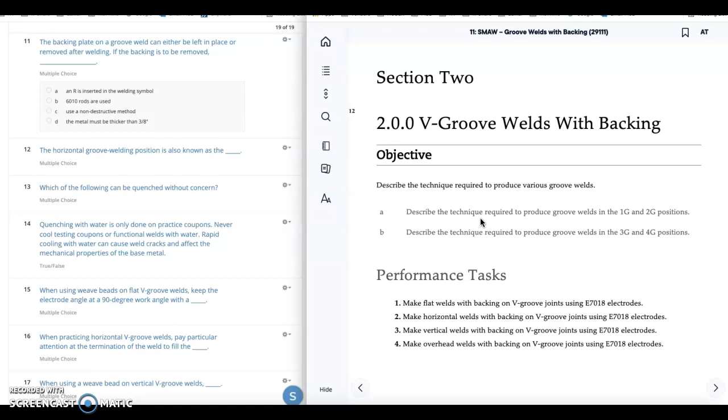Our objectives are to describe the technique required to produce groove welds in 1 and 2G, and describe techniques required to produce groove welds in 3 and 4G.

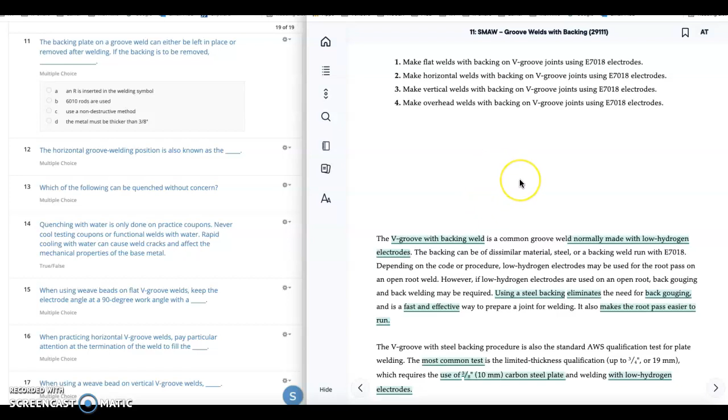Performance task is going to be a 1, 2, 3, 4G weld using 7018s. We're going to be doing that in the lab. You guys have been working with padded beads, which is really not a lot different, but there are some differences, and we're going to have to start using those coupons. You're going to have to start assembling, cutting metal, beveling, and assembling.

V groove with backing is normally made with low hydrogen 7018 electrodes. Using steel backing plates eliminates the need for back gouging and is a fast, effective way to prepare the joint for welding. It also makes welding the root pass easier because you don't have to worry about blowing through like an open root. The V-groove with steel backing procedure is also used as the standard AWS qualification test for plate welding.

The most common test is the limited thickness qualification up to 3/4 inch, which requires use of a 3/8 inch steel plate and welding with a low-hydrogen electrode.

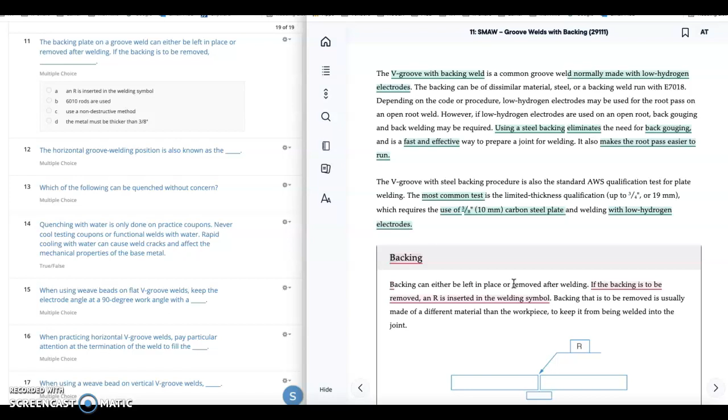Interesting little footnote here. The backing can either be left in place or removed after the welding is done. If the backing is to be removed, an R is inserted in the welding symbol. See right here, the little welding symbol with this weld together. The R stands for remove.

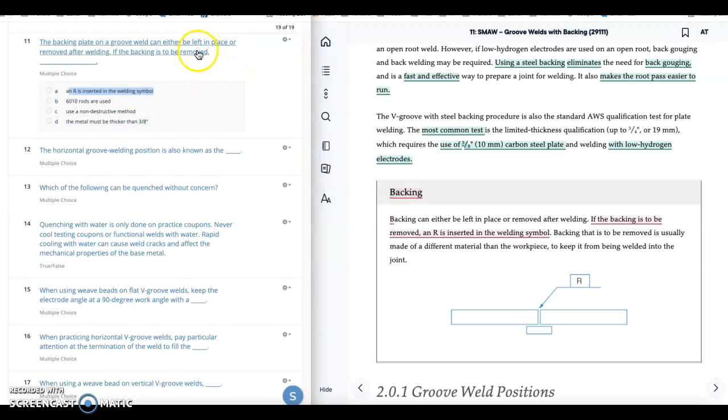Test question over here. The backing plate on a groove weld can either be left in place or removed. If it is to be removed, highlight: an R is inserted in the welding symbol.

All right, let's talk about groove weld positions. Groove welds can be made in all positions. The weld position for plate is determined by the weld and the orientation of the workpiece. For a groove weld in a flat position, that's 1G; horizontal is 2G.

Test question, study guide question. Horizontal groove weld position is known as 2G. Groove weld positions for plate are flat, which is 1G, horizontal is 2G, vertical is 3G, overhead is 4G. You guys should know all 4 of these by now, you've been welding them. There should be no confusion, it's 2G for groove, 2F for fillet.

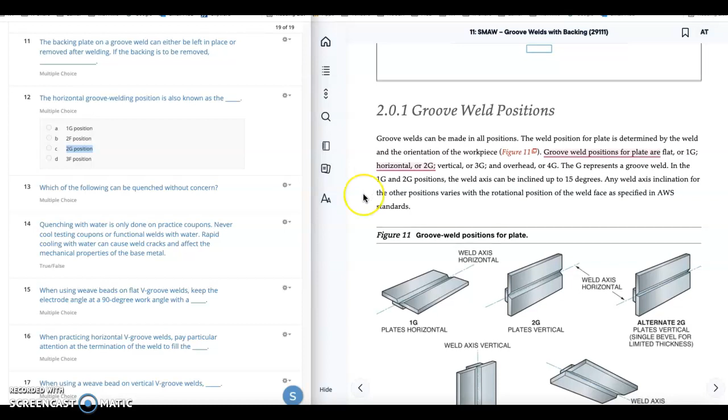F and G and 1 through 4, that mystery is solved. Which of the following can be quenched without concern? Okay, let's talk about quenching.

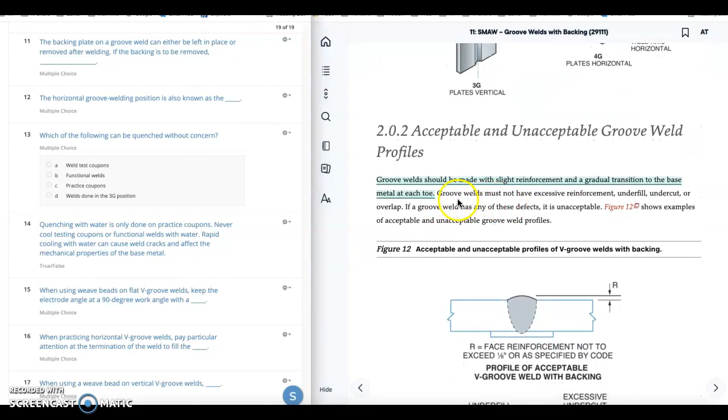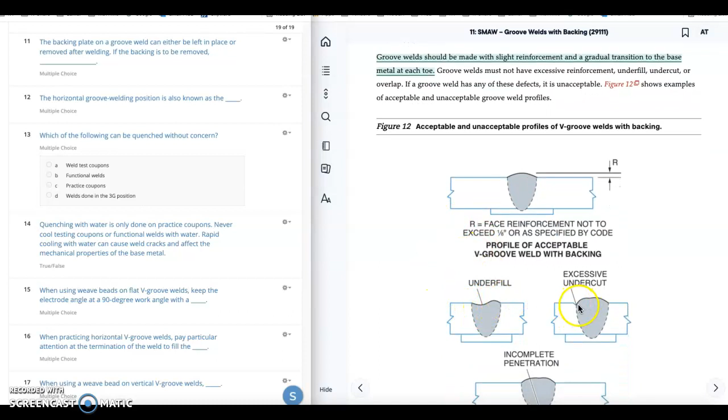Groove welds should be made with slight reinforcement, gradual transition to the base metal at each toe. Here's some examples of underfill, excessive undercut. This is a proper, acceptable weld. Incomplete penetration would show up on the X-ray as incomplete penetration. The root weld did not have 100% penetration down to the backing strip.

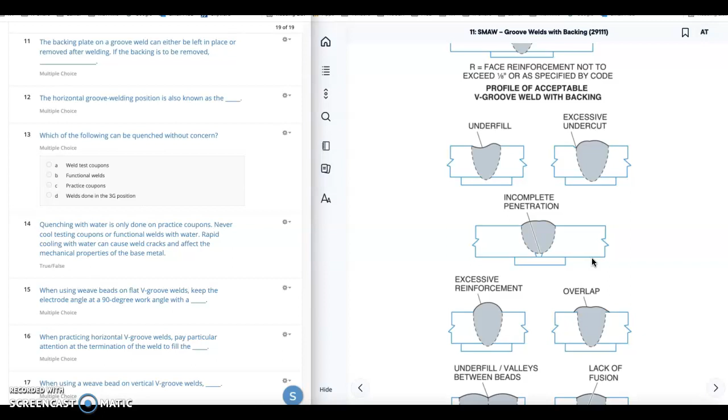Excessive reinforcement, this big hump right here on top. Overlap is too much on either side, with a little concavity in the middle, or convexity in the middle of the concave. Underfill is valleys between the beads, that's another form of lack of fusion. Here's some lack of fusion down here that would show up in the X-ray.

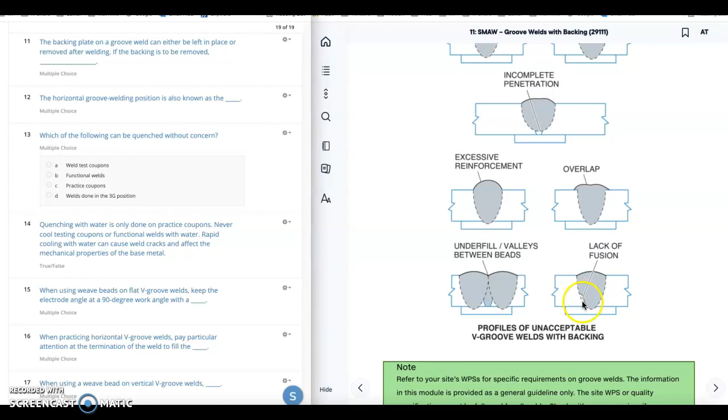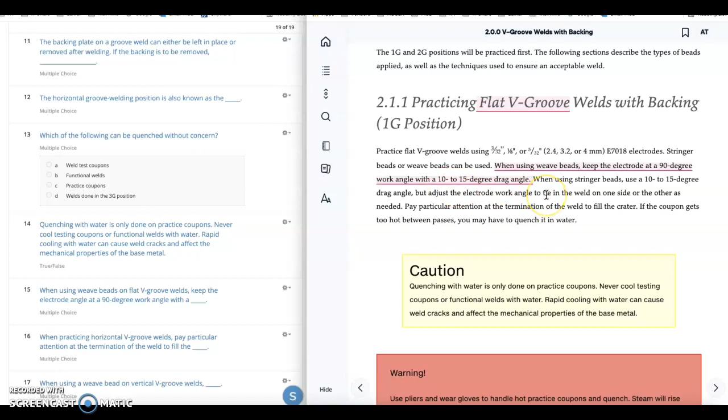Turn the page. Flat groove weld: when using weave beads, keep the electrode at a 90-degree work angle with a 10 to 15 degree drag. Practicing flat V groove welds with backing, 1G position. There's your rod angle when you're in the 1G.

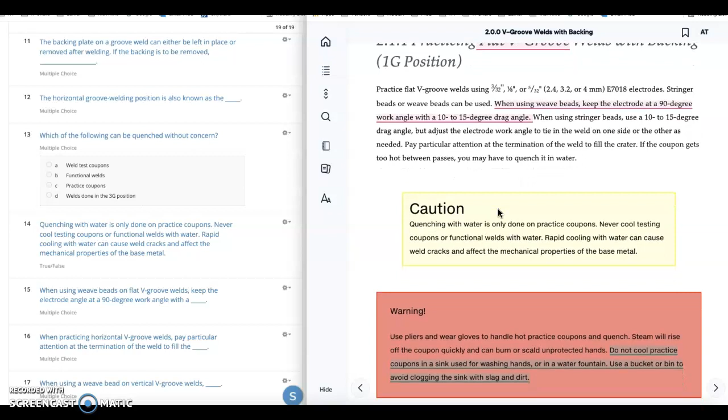Do not cool practice coupons in a sink used for washing hands or in a water fountain. Use a bucket or a bin to avoid clogging the sink with dirt.

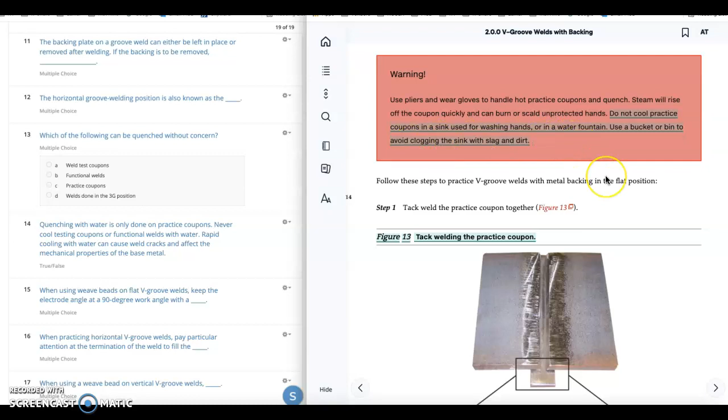Quenching with water is only done on practice coupons. That's actually a test question. Never cool testing coupons or functional welds with water. Rapid cooling with water can cause welds to crack.

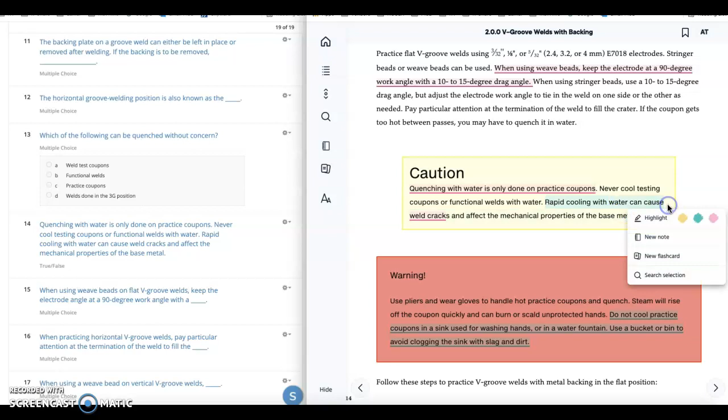Which of the following can be quenched without concern? The answer is practice coupons.

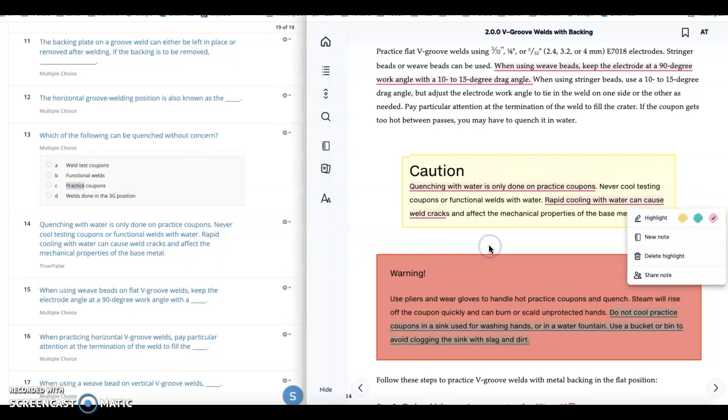Quenching with water is only done on practice coupons. Never cool testing coupons or functional welds with water. Rapid cooling with water can cause weld cracks and affect the mechanical properties of the base metal. True or false? That's true.

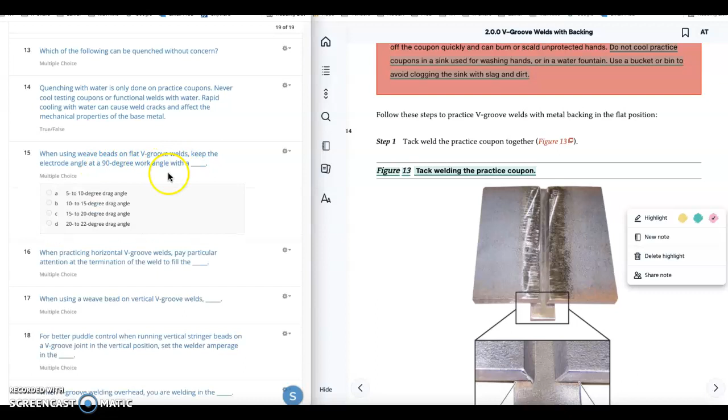When using weave beads on flat V grooves, keep the electrode angle at a 90-degree work angle with a 10 to 15 degree drag angle. So on flat, 10 to 15 drag angle. 90-degree work, 10 to 15 drag. These are flat or 1G groove welds.

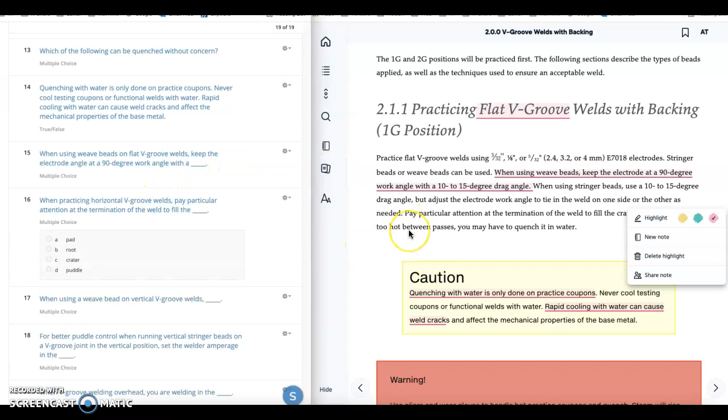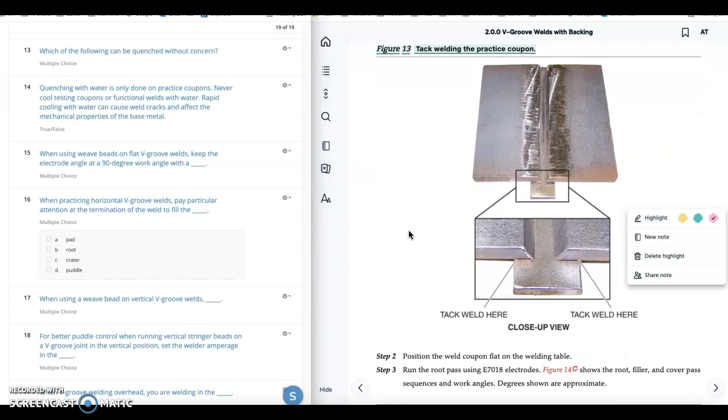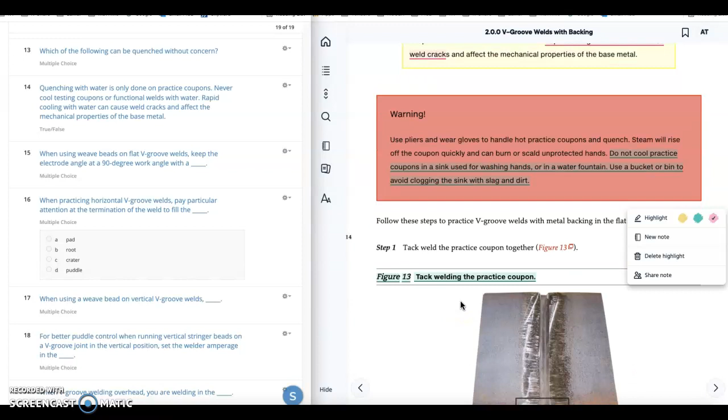When practicing a horizontal, tack weld the practice coupon. Tack weld here, tack weld here, tack it together. Position the weld coupon flat on the table. Run the root pass using 7018.

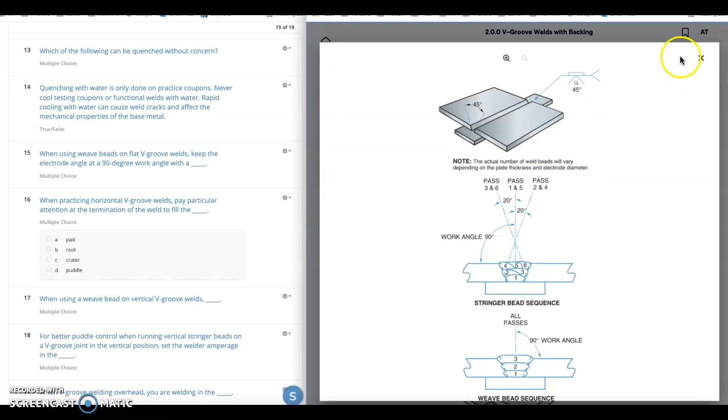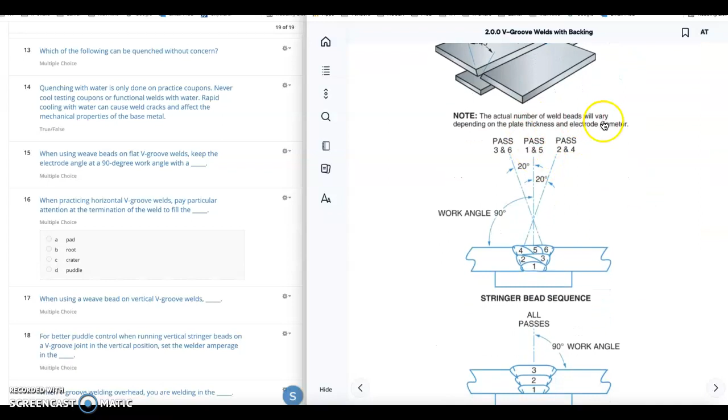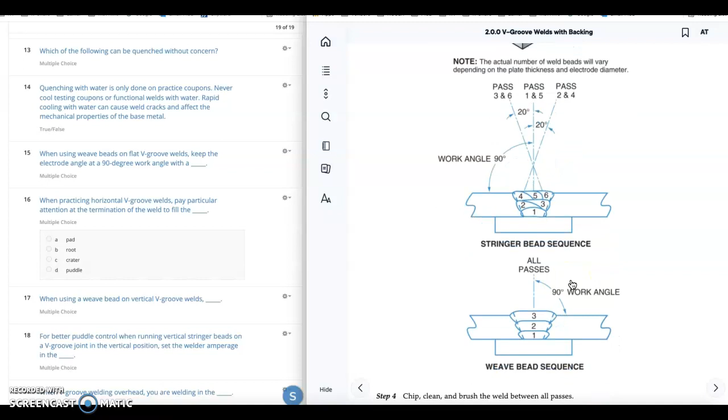The actual number of weld beads varies depending on plate thickness and electrode diameter. We use a 3/32 welding rod, so you're going to look at 6 passes: root, fill, cap. That's what you should expect. These weave passes are not acceptable for the welding competitions. If there's a new WPS, if it's not out yet, it's coming. We're not going to practice this because that's going to handicap us if they force us to do a multi-bead cap.

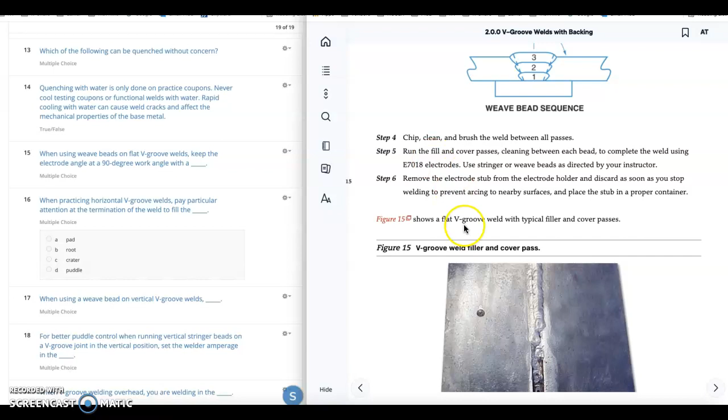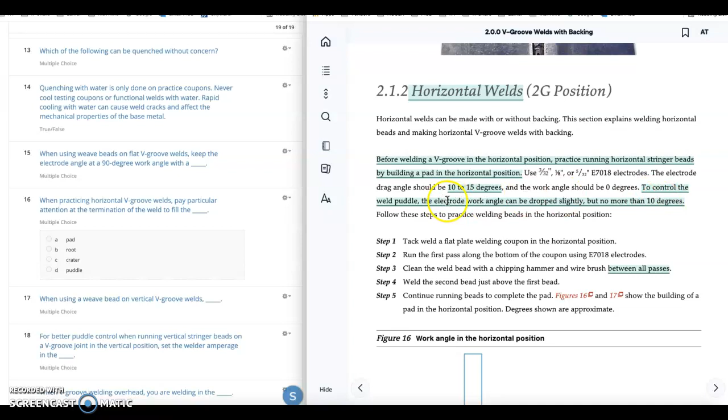All right, moving right along. V groove, 2G. Before welding in the V groove, the horizontal stringer beads are basically the same. Drag angle 10 to 15 degrees, work angle should be 0. To control the weld puddle, the electrode can be dropped slightly, but no more than 10 degrees.

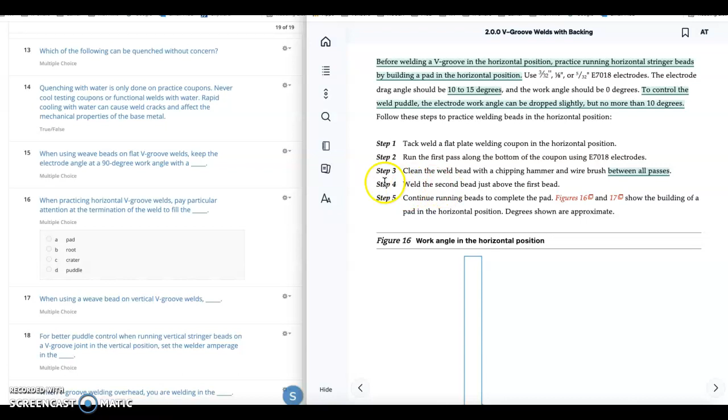Clean it between passes, and just practice. You want to start at the bottom and then stack them up. Don't start at the top. When you're going left to right in a 2G, you want to start down here and fill it going up. If you start up here and try to fill it going down, that's going to be a disaster.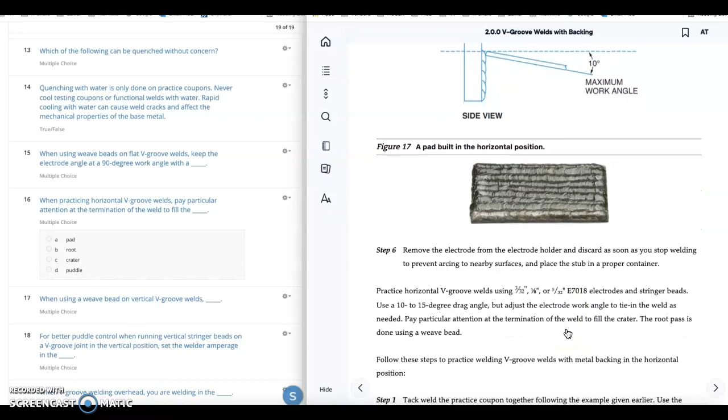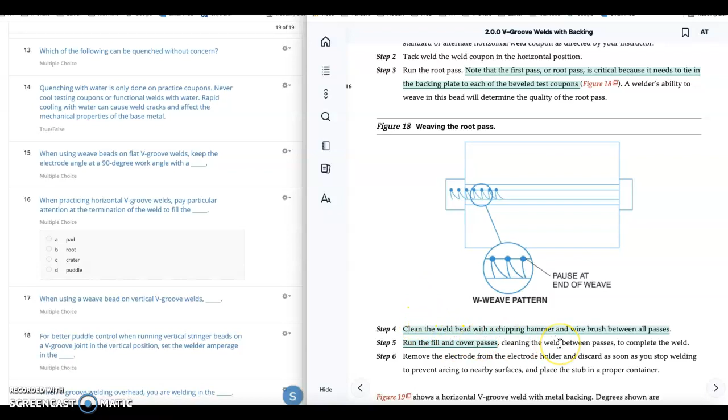Note that the first pass, the root pass, is critical because it needs to tie into the backing plate of each bevel test coupon. Weave a root with a W weave - you can see how they do little W's. You want to pause at the end of each weave. Clean the weld bead with a chipping hammer and wire brush between all passes. Run the fill and cover passes.

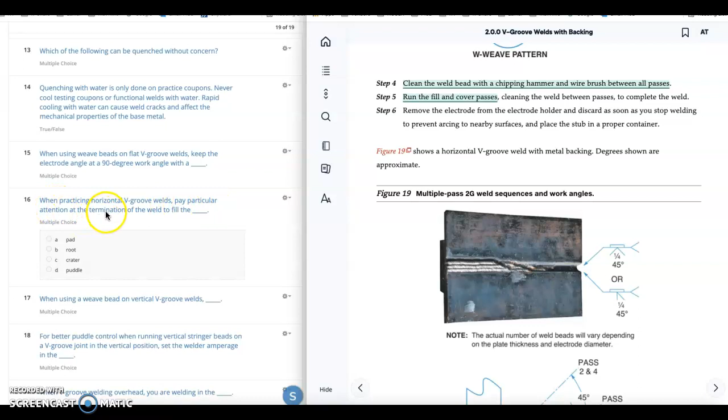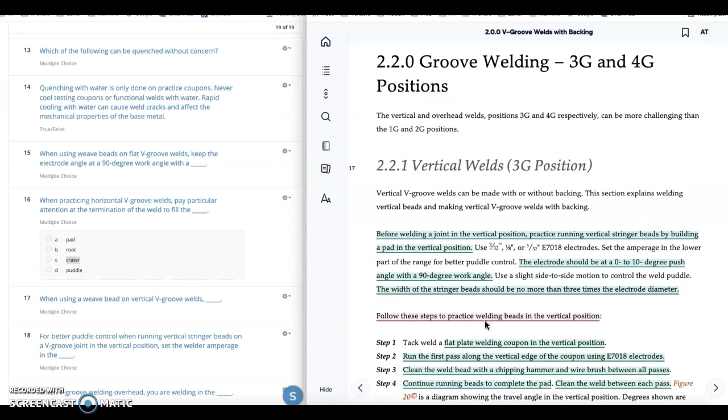This question says, when practicing horizontal V grooves, pay particular attention at the termination or end of the weld to fill the what? Fill the crater. I'm not sure where that is, but that's the answer. Follow these steps.

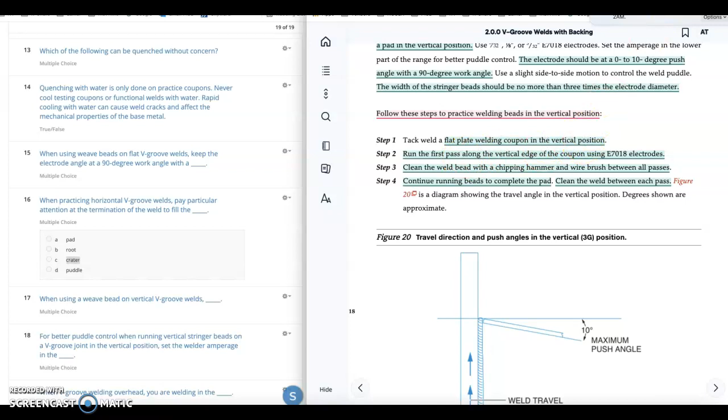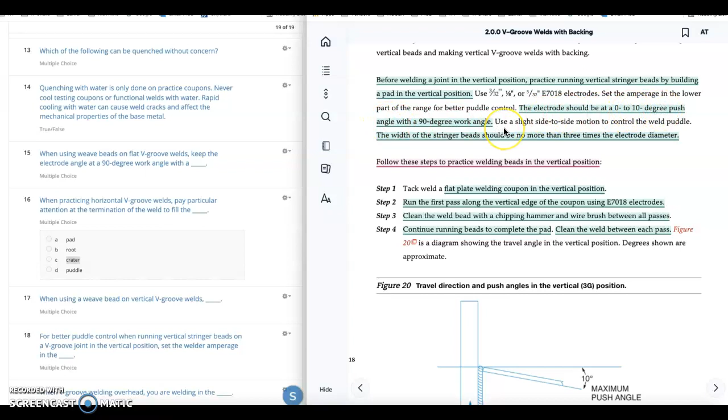Here we go with 3G position. Basically, you assemble your coupon and set it up. Clean between passes. Here's your rod angle - should be 0 to 10 degrees push with a 90-degree work angle. So you're just, you guys know this, you start down here and you're running it up. Just a little bit of a push, 10-degree rod angle.

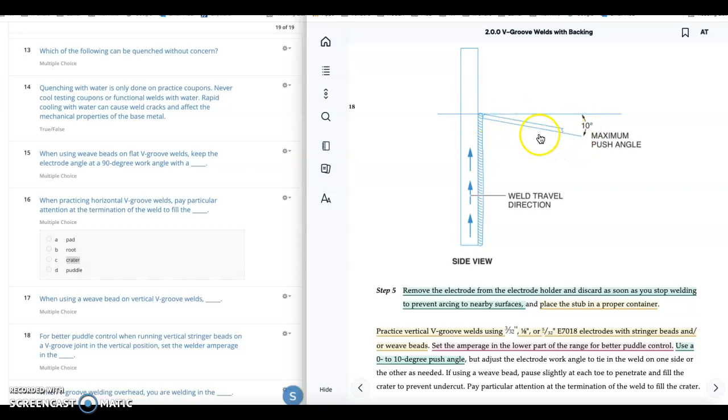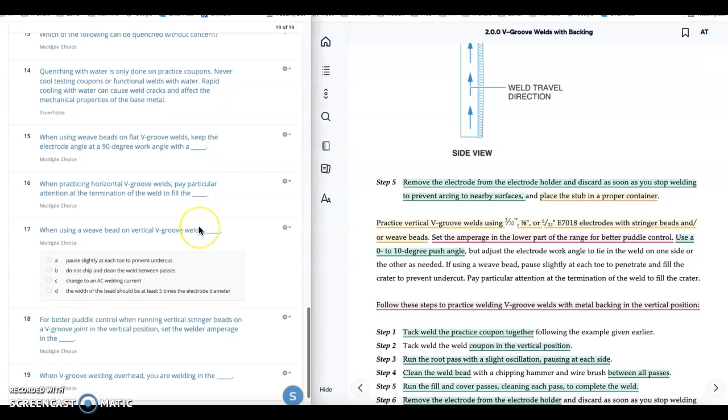Set the amp on the lower part of the range for better puddle control. When using a weave, make sure that you pause slightly at each toe to prevent undercut. For better puddle control, stay in the lower part of your amperage range.

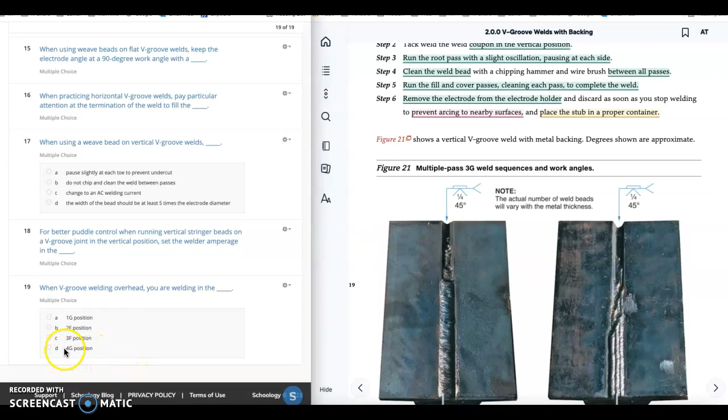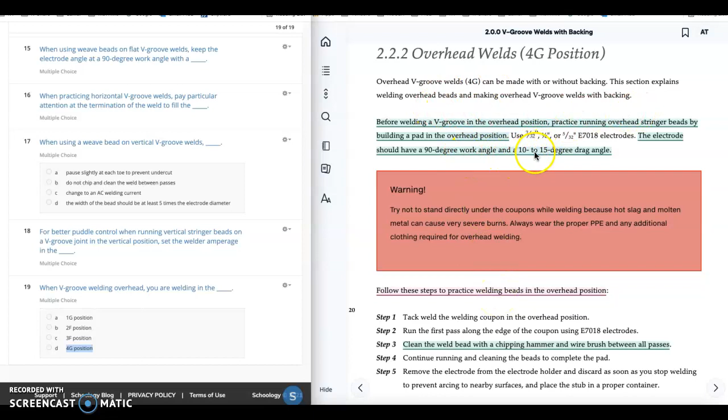When V-groove welding overhead, you are welding in the what position? What position is overhead - 1G, 2F, 3F, or 4G? I hope you guys said 4G, because it's 4G. Welding overhead in a 4G, you're going to keep a 90-degree work angle, 10 to 15-degree drag.

Follow these steps. Here's a good drawing. Weld direction is this way, 10 to 15-degree drag, moving in this direction.

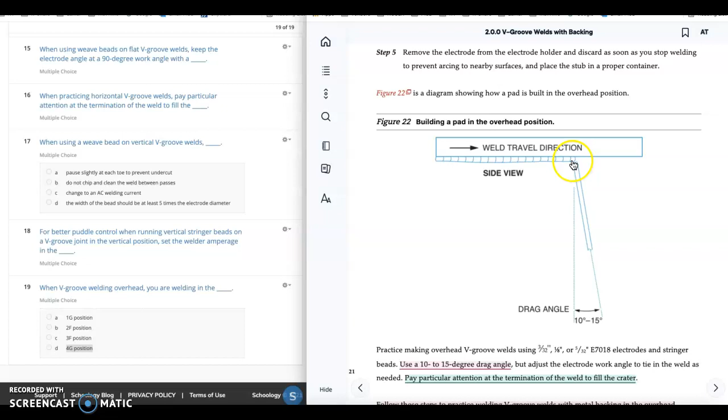And finally, which of the following can be quenched without concern? Practice coupons. When V-groove welding overhead, you're welding in the 4G position. And that's going to end Mod 11, Section 2.